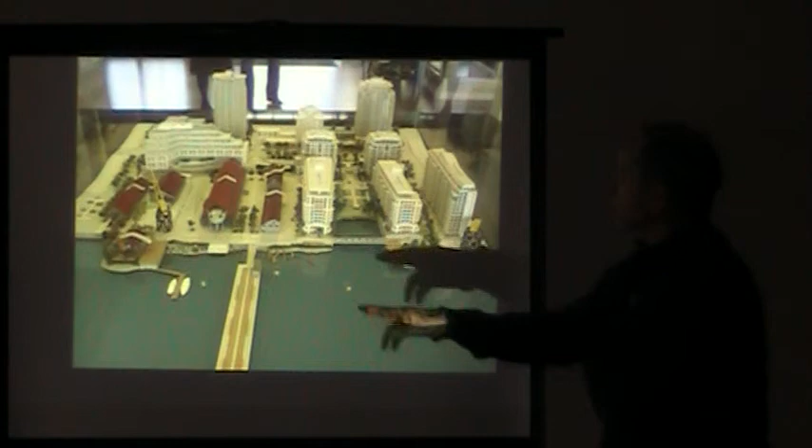Shows the notion of what had been contemplated for that location, as being that defined heritage character area.

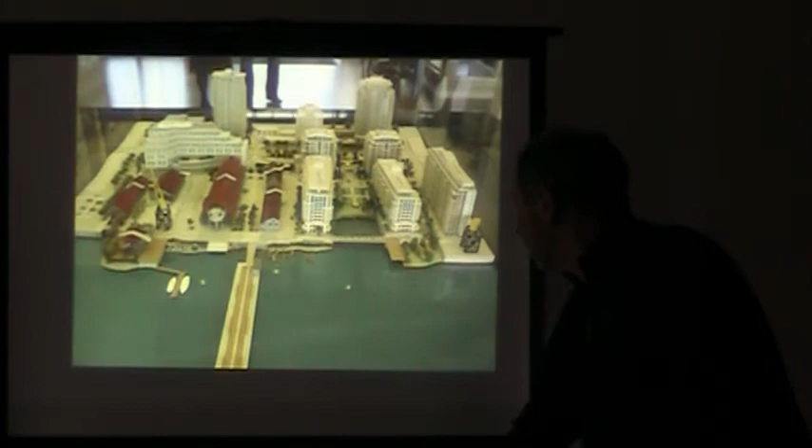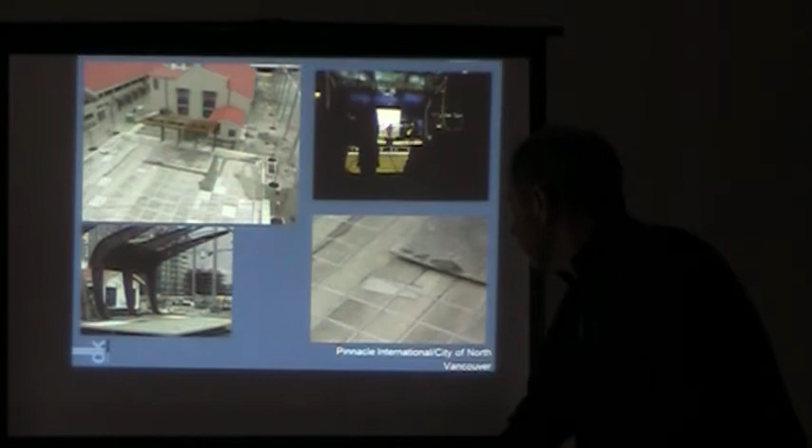These are things you've already seen, so I'm just going to power through these. These are examples of what's been built, but we just walked it, so you don't need to.

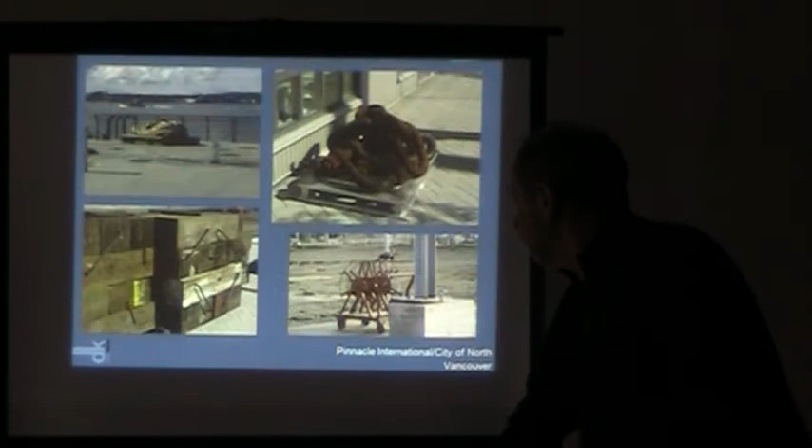Gary, can I ask, if there was such a strong vision for those heritage buildings, at any point did the city say, these are the shapes of the buildings we want, what do you want in them? Rather than asking what sort of building you want or how you want to use the site, has the city ever said, this is what we want, what could we fill it with?

That's how the vision started. It was very much that you're going to keep those buildings and work with them. That's why they were protected, and that was the vision, and that's why the coppersmith shop is there, and the pipe shop is there. It's why the Pier 7 restaurant looks the way it does, even though it's a new building.

That vision came into not total conflict, but partial conflict with the vision of a national maritime center. That vision was so strong, and the appeal of that kind of destination was so strong, it pushed over the notion of keeping some of those heritage buildings on Lot 5. But what survived was the idea that it would still bring back the machine shop and pick up on some of the elements, but they'd be new elements, with what they did on the remainder of the site.

So today we're kind of at a point where we have the remnants of two visions. The one thing that's still valid is the machine shop being retained.

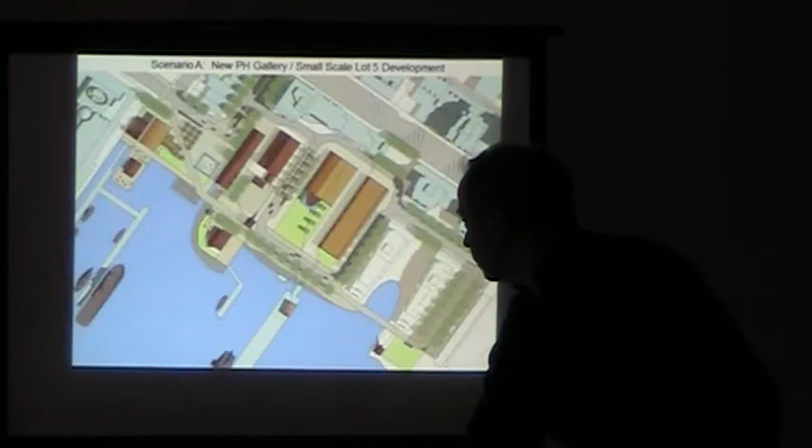Yeah, so the machine shop is part of the current vision, as is the Flamborough Head. Then the question is what should carry on with the vision - there's obvious reasons to. Now that the decision was made, and I think a lot of people were very surprised we couldn't get the feds and the province to make that National Maritime Center happen.

So now where we are is that you don't have the two buildings on the east end of Lot 5. And so, would you recreate them? There'd be a bit of a fake history thing, which you try and avoid usually. But you could pick up on the character of them. So I think it's fair to say right now, it's probably up for grabs a little bit in terms of what Lot 5's vision is going to be.

But it's in the context of everything that's happened so far and the things that are around it. So the two starting points, I guess, would be the machine shop and the Flamborough Head.

For people doing design work, especially in this context, you can choose to disregard things or choose to include things. It'll be harder for council to make some of those decisions, but they too could do that in the future and decide to do something very modern there, or something quite different, and abandon the vision of Lot 5 in its whole, and come back with a completely different look.

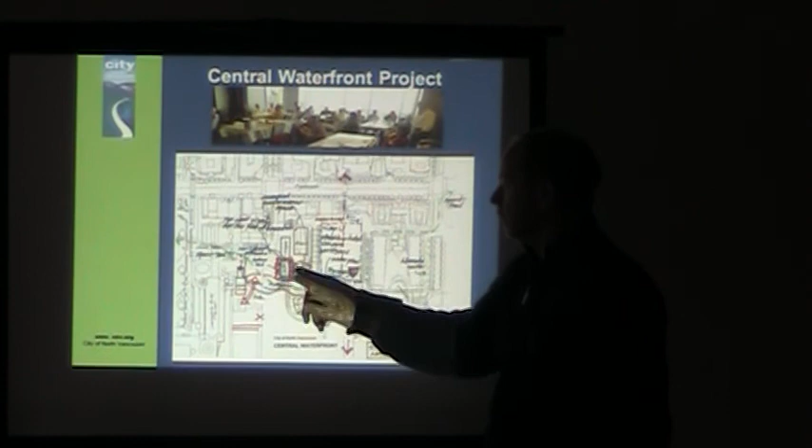And so what's come out of this process so far is a determination that the Presentation House Gallery would best be located on the Cates property, as I mentioned. The museum would best be located here. At the time there was talk that the theater group, Presentation House Theater, wanted to locate on Lot 5 as well.

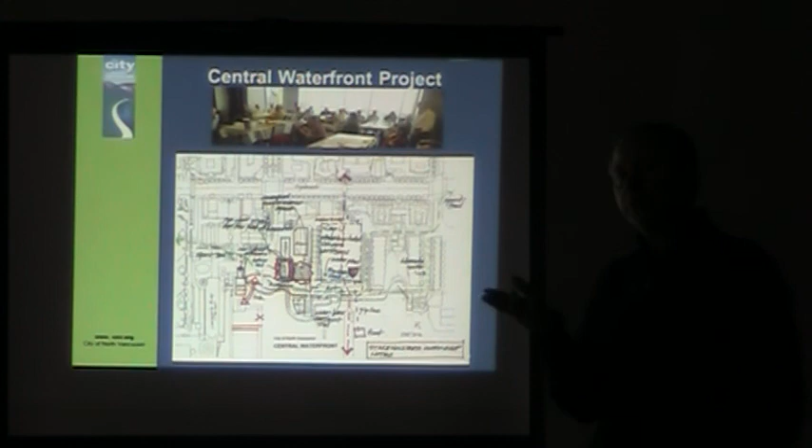They've since stepped back from that, and they think they could either stay where they are, or they could function in covered open space, and maybe even in tents to do something more seasonal, a bit more like Bard on the Beach does. They don't need a year-round permanent facility. It costs a lot of money to build and maintain a facility, and the prospect of doing that is pretty daunting, so they're opening up ideas of other possibilities.